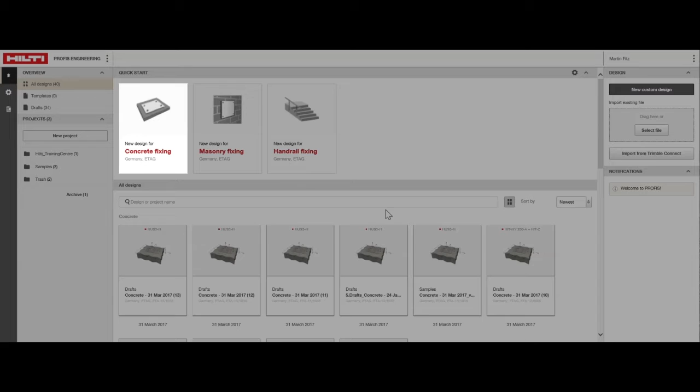First, navigate to the Concrete Design module from the Setup screen. To get started, select whether your base material is cracked or uncracked concrete. The default selection is cracked. Uncheck this only if the concrete will remain uncracked throughout its life cycle and supporting calculations can be provided showing concrete will always remain under compression. For this example, we've selected cracked concrete.

Now we must choose the concrete grade from the drop-down box. C20/25 to C50/60 are covered by standard anchor approvals. Low-strength concrete is allowed for selected anchors and is designed according to the Hilti SOFA method. For this design, we'll select C25/30. Let's move on to reinforcement.

Choose None when reinforcement is completely absent. Choose Wide when rebar spacing is greater or equal to 150 mm regardless of bar diameter. You should also choose Wide if rebar spacing is more than 100 mm with a rebar diameter smaller than 10 mm. Dense should be selected for all other cases, including if the degree of reinforcement is unknown. Highly reinforced concrete members actually have a negative impact on anchors with shallow embedment depths. For this example, we'll select Wide.

Edge reinforcement works in the opposite way, in that the resistance increases with an increasing degree of reinforcement. Choose None when reinforcement is completely absent. This is the most conservative option. Closely spaced stirrups act as hanger bars. The effect of each of these settings differs from guideline to guideline. For this design, we'll select None.

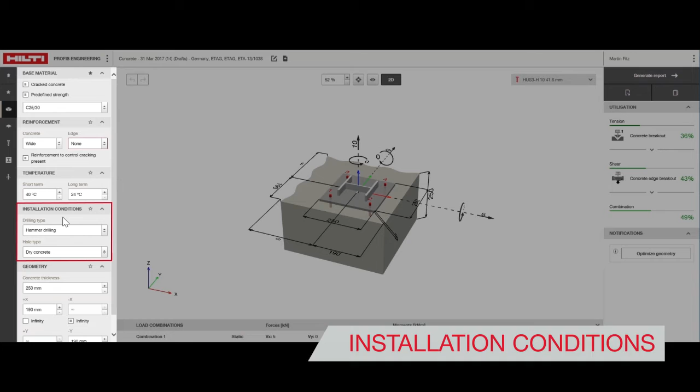Concrete temperature affects the design performance of chemical anchors. Enter the maximum mean value over a typical day-night cycle in a number of weeks or months. The drilling method and the condition of the hole while installing the anchor are defined under installation conditions. This influences the anchors available for selection as well as their load capacity.

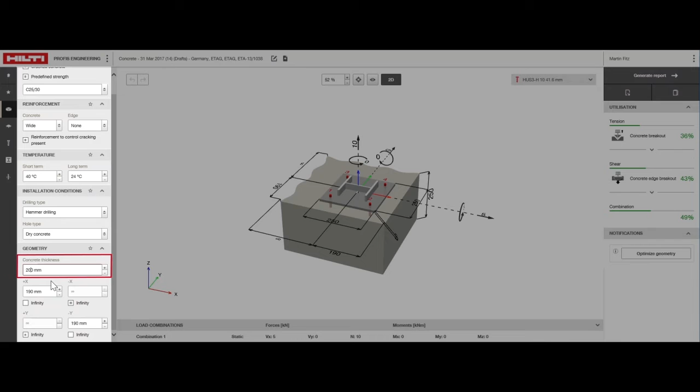To position the profile on the concrete, values can be entered in the 3D model or in the Menu tab. First, we must set the thickness of the concrete member. This limits the depth to which the anchor can be set. We'll set the concrete thickness to 200 mm.

Next, set the position of the steel profile with respect to the concrete edges. This affects the amount of concrete activated for tension or shear loading. Here's where you can set the edge distance. We've set the distance between the center of the profile to the concrete edge at 300 mm.

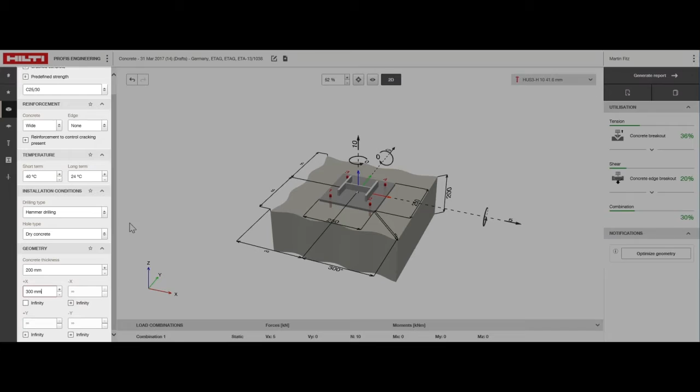Now it's time to choose the type of load: static, seismic, fatigue, or fire. For this design case, we'll apply a static load with a compression load of 10 kilonewtons, a shear force towards the edge of 15 kilonewtons, and a bending moment about the y-axis of 10 kilonewton meters.

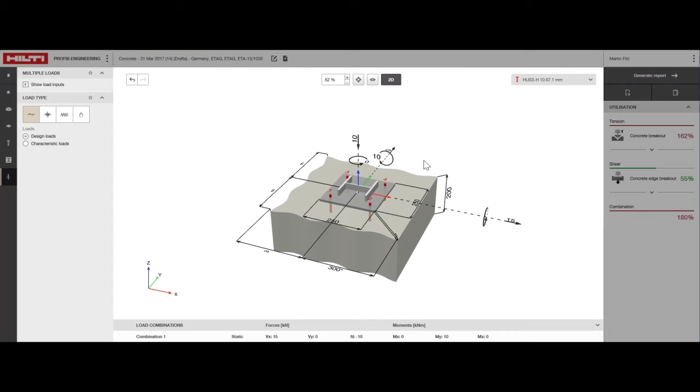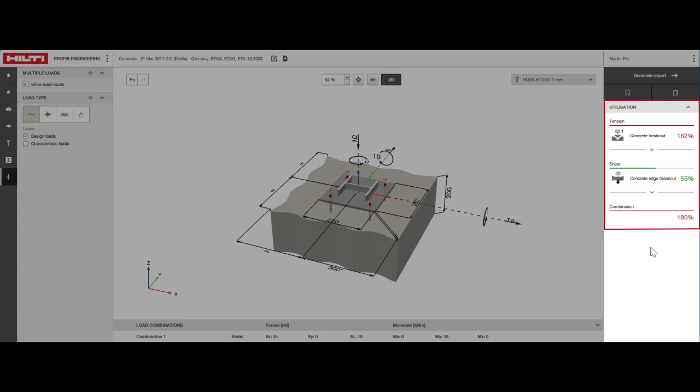A valid solution should have the anchor utilization ratio less than or equal to 100%. If we look to the right, we see a utilization of 180%, which means adjustments are needed. There are ways we can fix this. We could change the anchor, keeping the base plate dimensions and anchor spacings fixed, or we could keep the anchor fixed and adjust the base plate dimensions, anchor spacings, and number of anchors. Let's try the first approach.

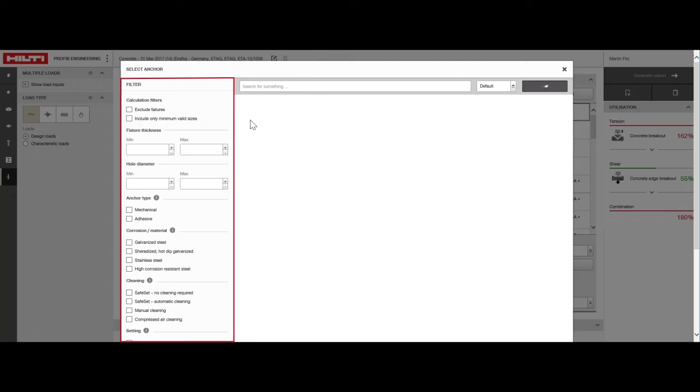In the anchor selection window, we can go through each family type and size until we get a utilization of less than or equal to 100%. Or to speed things up, we can calculate all anchors that can be used with the same design inputs. In the filter settings to the left, we can show only those anchors which work. The first thing you may notice is that the utilization is 100% for all anchors. That's happening because the optimized embedment depth option was pre-selected.

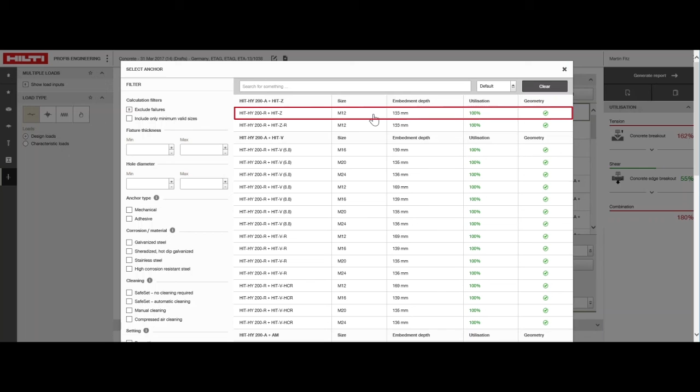Here we see that HIT-HY 200 adhesive with a HIT-Z M12 rod at an embedment depth of 133 mm provides a solution. By clicking on the anchor, we select it for this design and return to the main window. At the bottom of the anchor selection window, we now adjust the embedment depth to 140 mm by switching to User Selected Embedment Depth and entering 140 mm manually.

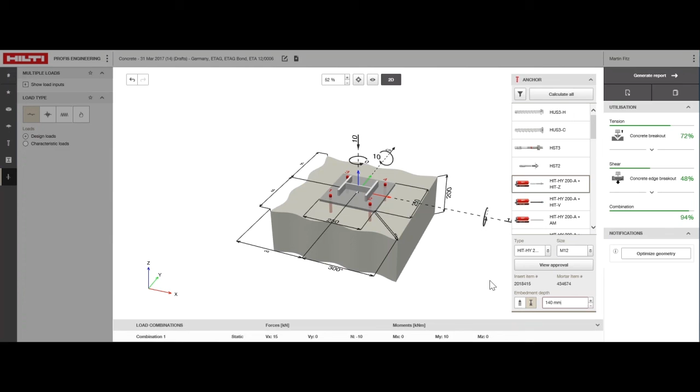Now you have the information you need to jump in and start designing anchor fixings in concrete quickly and accurately.